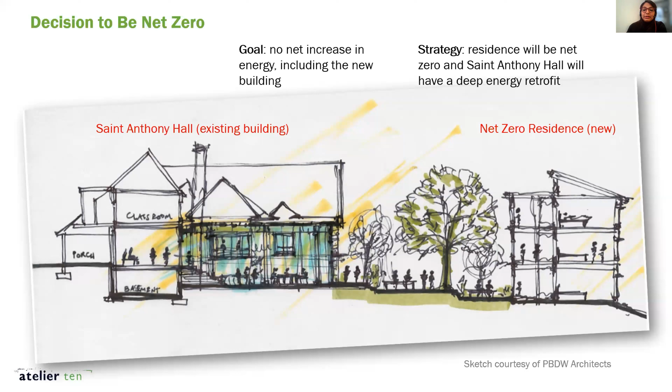When we set out to do our energy analysis, our discussions were mostly around what our goals and ambitions were, and how we were planning to achieve them. This project was meant for residents who are not necessarily from the state—they're coming from warm climates near the equator, so they really weren't used to these cold conditions. Thermal comfort was a priority.

We wanted to make sure our success was measured using data, energy simulation, and eventually measured data. We knew we wanted a net zero project, but not just for year one—we also wanted to account for a buffer, so that any variation in operation and climate would be accounted for in this analysis.

We had several opportunities, such as making sure the massing was set right from the beginning itself. We also had challenges because this is a net zero project—we had a limited roof area to begin with, which was one of the bigger challenges we knew we had to deal with.

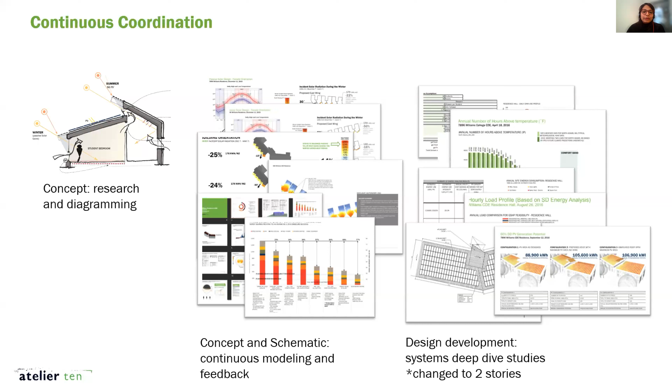Using our energy model as a reference, we were able to show how a certain decision would impact the overall goal for net zero energy. In terms of modeling tools and workflow, we used IES VE in the beginning—this was 2015, for early schematic design phase modeling, where we evaluated all of the passive strategies using the IES software.

And then as we transitioned and as we firmed up the design, we moved on to eQuest so that we could model the waterside systems a little bit more closely. Again, this was to make sure that we are overcoming certain limitations in the modeling tools back in the day.

For PV generation potential studies, we used Rhino and Grasshopper so that we could account for shading and overshadowing, and so that we could also account for the trees and the neighboring context more accurately.

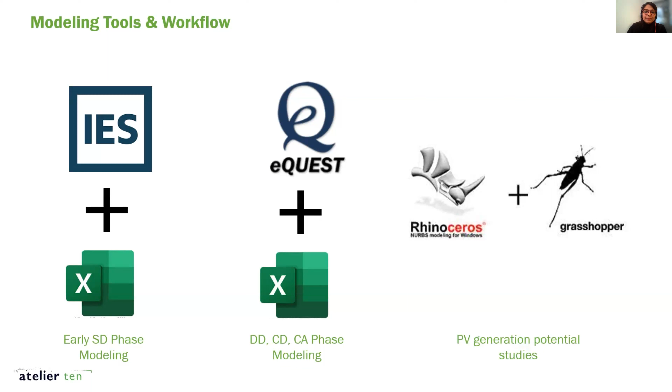Overall, we first started with developing an energy budget with the available roof area and calculated the PV generation potential as a starting point. We compared this with the energy use profile of a baseline, ASHRAE baseline energy model. The black line shows the baseline consumption data, and the shaded green portion shows the on-site generation potential from the available roof area.

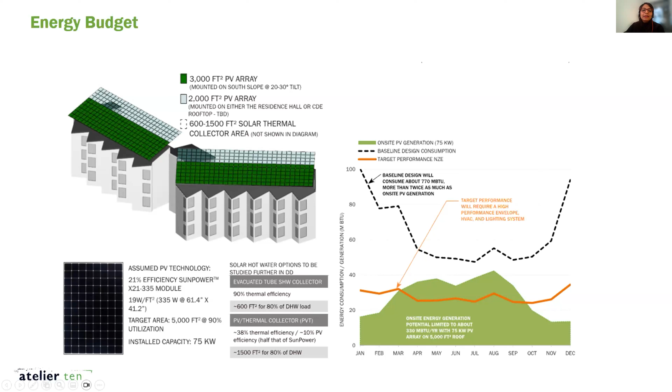And we very quickly knew that we had to look at several energy efficiency measures in order to make sure that we can hit our net zero energy goal.

We started with a passive-first approach, and we performed an envelope sensitivity study where we tested several R values for the windows, walls, and roof in order to come up with an optimized performance for the envelope. We looked at how much of an impact that makes to the annual HVAC savings, so that we are not over-insulating, but making sure we are hitting that sweet spot beyond which the envelope does not make a difference.

Along with that, we continuously coordinated with the architects to review their architectural details to make sure that there are no thermal bridges, and if there are, we provided recommendations on how to avoid or tackle these thermal bridges or minimize the thermal breaks in the design.

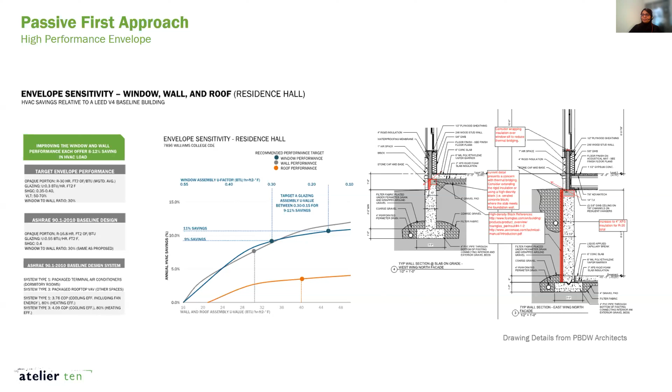Next up, we also looked at how we can limit summertime cooling. With this climate, we knew it was to our advantage, and the temperatures were not significantly high, but even so, we thought we should look at the peak design day condition to evaluate how we can minimize summertime cooling by deploying natural ventilation and operable windows and looking at external shading.

In addition to that, we also looked at how we can further reduce the discomfort hours by implementing supplemental ventilation cooling strategies in the project.

Overall, we did see a significant reduction in the discomfort hours as indicated by the graphs on the right. And all of these passive strategies helped us make sure that our electricity consumption from mechanical cooling in dorm rooms was minimal.

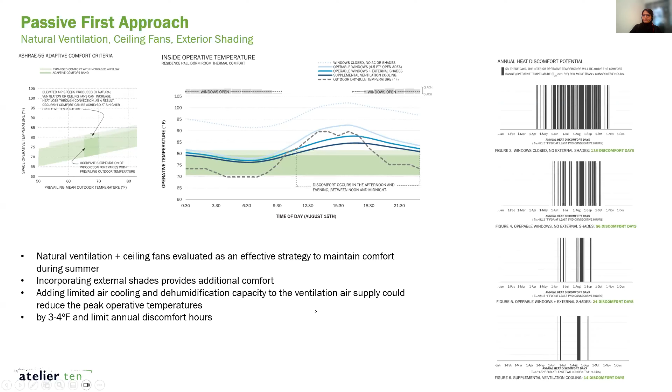Along with those passive strategies, we then looked at several other energy efficiency measures to evaluate a pathway to achieve the net zero energy goal that we established.

So here you're looking at the bar graphs where the base design had steam because this project had steam. But when we're looking at an ASHRAE-compliant baseline, the energy consumption was significantly higher, as discussed earlier,

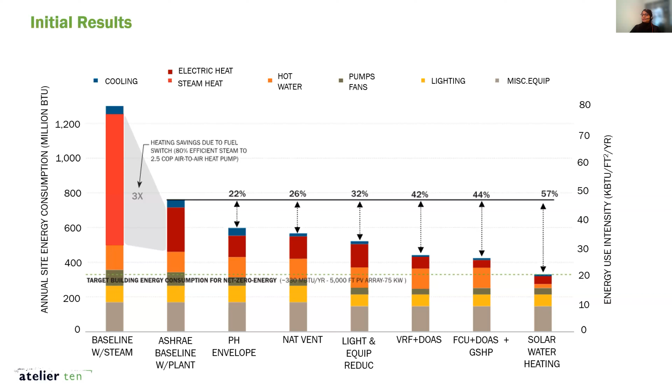compared to what the roof can generate. As we implemented energy efficiency measures such as passive house envelope, natural ventilation, reductions in lighting and equipment, and looking at more efficient all-electric systems, we were able to gradually reduce the overall energy consumption. The solar water heating system is another measure that helped reduce the domestic hot water requirement, or the energy consumption by the domestic hot water, in this project.

Another thing we looked at was the first cost for several variations of all the energy efficiency measures we evaluated, because space was a constraint and we also wanted to make sure that we are not exceeding the PV requirement for this project.

We were looking at the implications of an increase in first cost and compared that to an increase in first cost for PV. So for some scenarios, we found that often the lower first cost solution resulted in an increase in the first cost of additional PV required for the project.

While in some cases, such as these HVAC alternatives, we found lower first cost solutions which are energy efficient and do not result in an increase in PV requirement. This helped the design team take decisions around first cost, while making sure we are not compromising the net zero energy goal.

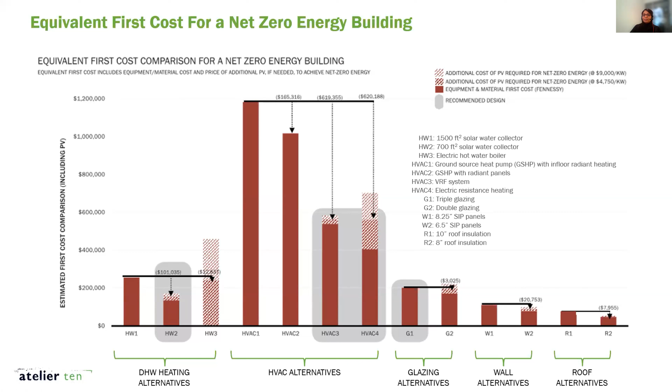For the PV generation potential, as I mentioned, we used Grasshopper and Rhino to evaluate the context implications on the renewable electricity generation potential. We found that when you add these trees, you reduce the overall generation potential by around 7%, which is significant for a net zero project.

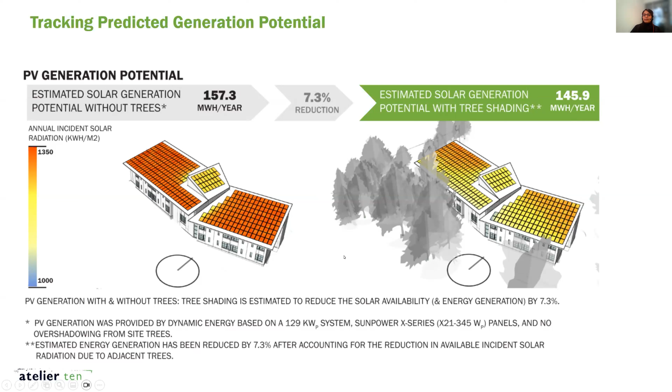So making sure that we are understanding what our energy budget is again is very critical when it comes to PV generation potential.

One other thing we looked at was the year-on-year degradation of the PV panels. We knew it didn't have to be net zero just in year one, but wanted to make sure it's net zero for all future years. So we accounted for a buffer in the energy production capacity, comparing the percentage of degradation per year while deciding what products to use for the project.

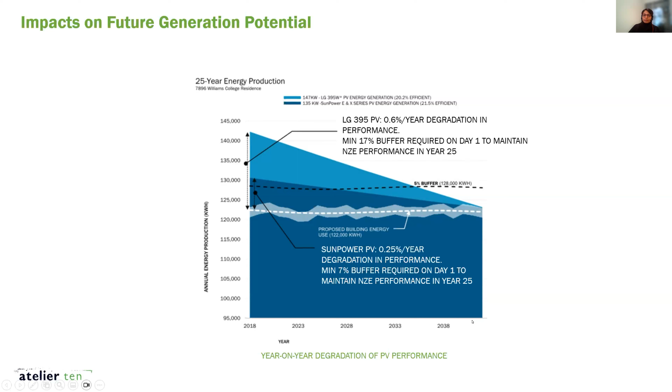Because this is a net zero project, we were constantly tracking assumptions. Operational schedules were reviewed several times during the energy modeling process, which plays a big role since this is a dorm building, and there are times of the year when students aren't in the facility. We wanted to account for that, but the decision kept changing, so we had to make sure we had buffer for students to be in the dorm during summer months as well.

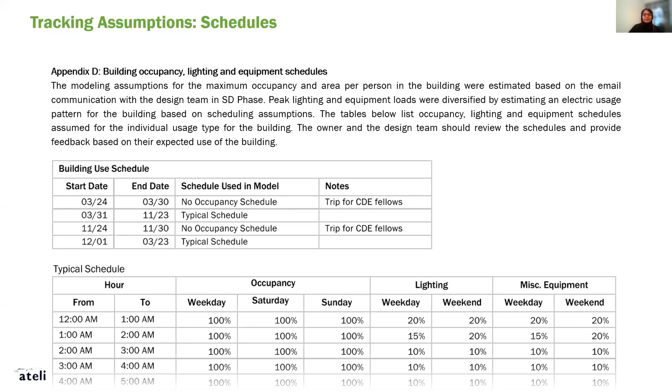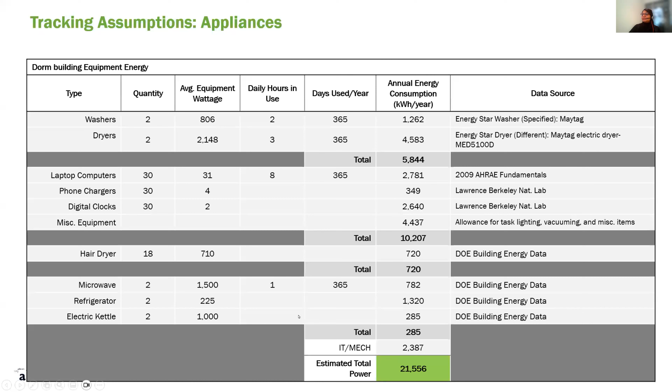The other big item was tracking the assumptions for the appliances. We had a laundry list of all the appliances that would go into this facility based on the occupancy we knew about, and this was verified and reviewed by the university. Even when looking at submittals, we kept an eye out for any large pieces of electricity hog equipment, so we weren't missing our target.

The other big piece was domestic hot water demand. Understanding the shower duration and sink usage was very critical when identifying the overall daily total of hot water gallons used in this project, so we could come up with an estimate for the hot water consumption and energy use.

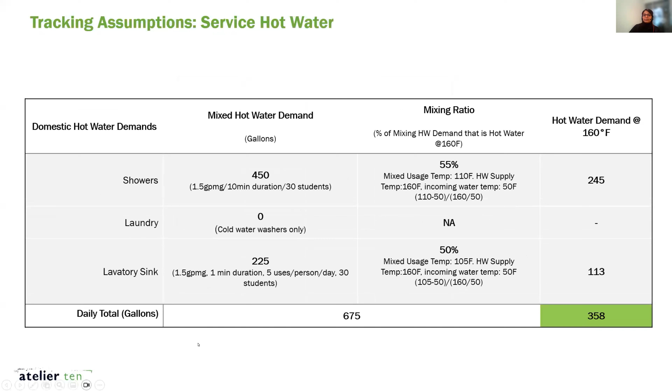Overall, at 100% CD phase, we landed on a design that was truly high performance, with a modest window-to-wall ratio of 22%, R40 walls, R60 roof, making sure our air leakage rate did not exceed 0.6 ACH at 50 Pascal, following passive house requirements. We also made sure blower door testing was included in the commissioning requirements, which did come up lower than 0.6 ACH when we evaluated it.

The mechanical system for this project included geothermal well fields and ground source heat pumps, and the air side included dedicated outdoor air units with 4-pipe valence units for supplemental heating and cooling. For domestic hot water, we tried hard to incorporate heat pump systems for heating, but with size constraints and the fact that we weren't able to put in a centralized system, we switched to an electric hot water point-of-use system. A 129 kilowatt PV array was finally put in to achieve the net zero goal.

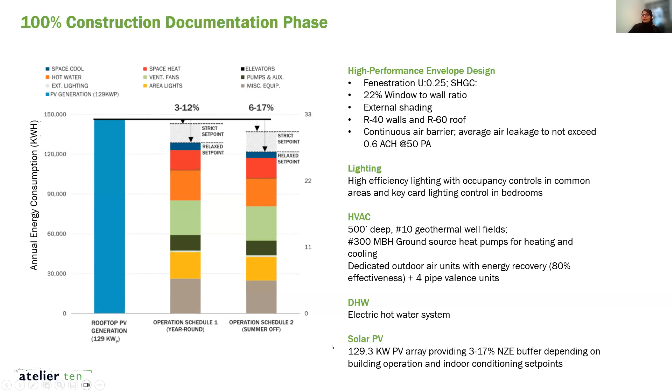We came up with several recommended operational practices for the facilities as well as the students, so the project continues to stay net zero, because mindful usage is very critical in making sure the project keeps hitting these goals year on year.

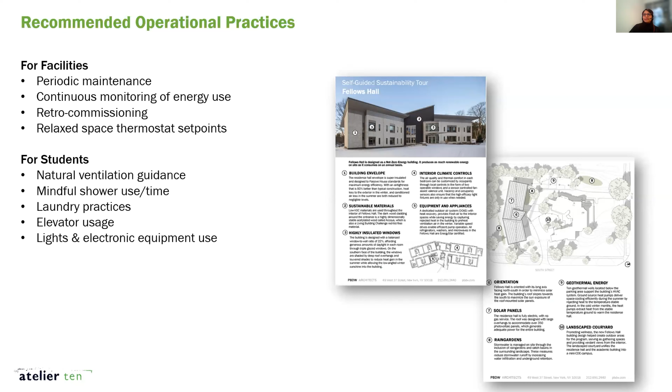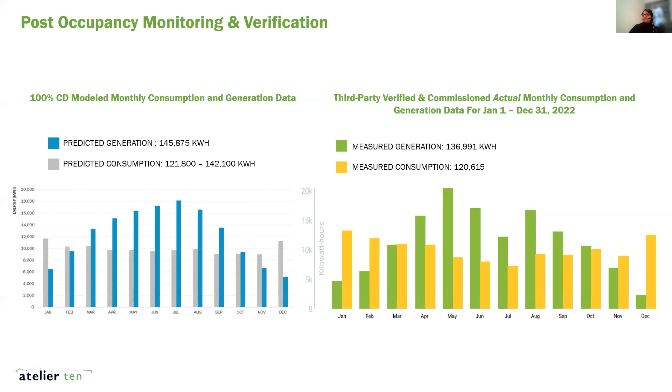Lastly, I wanted to share the post-occupancy monitoring and verification. This was completed by another organization hired by the university. On the left you see the modeled predicted generation and consumption data, and on the right the third-party verified commissioned actual consumption data on a monthly basis for the last year, which, although there's a difference between what was predicted and modeled, is fairly close to the analysis we did.

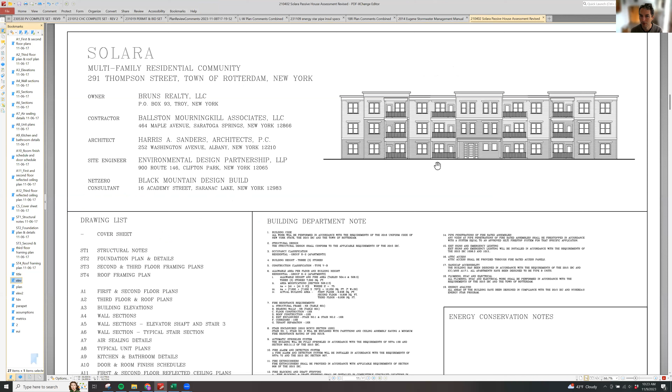Basically, it's a 3-story double-loaded corridor walk-up apartments. There's 24 units per building, mostly 2- and 1-bedroom units. And of course the leaf blower comes now, so I apologize if there's background noise.

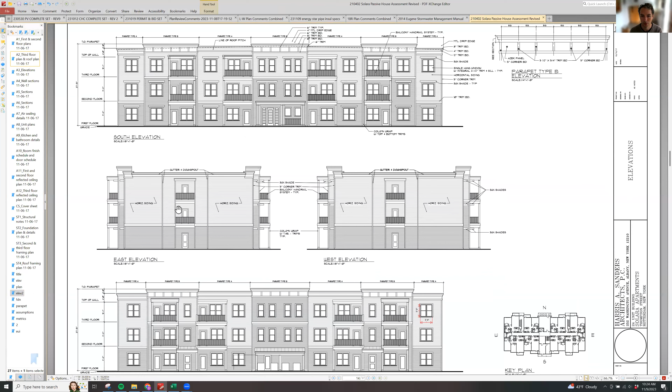The elevations has the south - the kind of long axis of the building is more or less oriented to the south within 15 degrees, and there's equal window to wall ratio on the south and north facades, but no fenestration on the east or west.

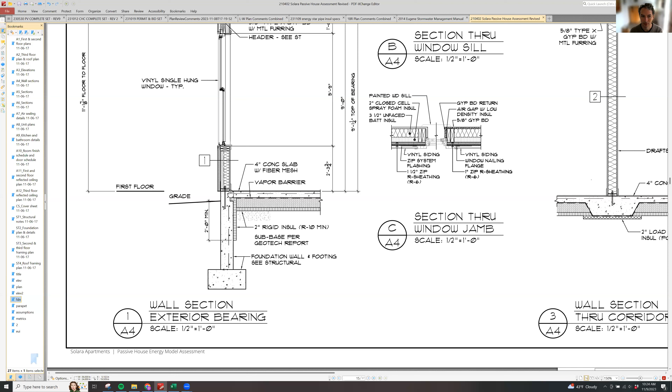It's a 2x6 construction with a mix of closed cell foam and batt insulation in the cavity, along with zip sheathing, so a 1-inch of polyiso on the exterior continuous. We achieved a thermal break at the slab with the inset kind of sliver of foam you can see here, and I'll zoom in on that just a little bit.

And then continuous foam underneath the entire slab as well. Up at the parapet, we have 7 inches of foam over the deck at minimum, and then some spray foam to kind of span the gap along the rim of those flat roof trusses.

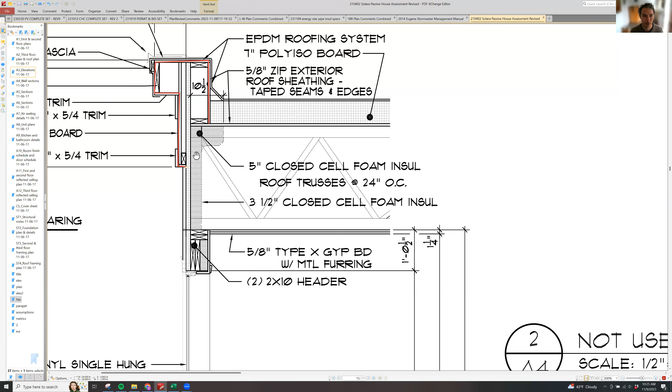To quickly walk through the design of the project, again, this is Albany area, so climate zone 5. In both models, we're following the standard assumptions of the modeling protocol. So with the PHPP, we're following a PHI protocol. With WUFI, we're following PHIUS protocol. So we're using the heat...

Those have the same heating and cooling set points, and very similar occupancy, a difference between 57 and 62 occupants.

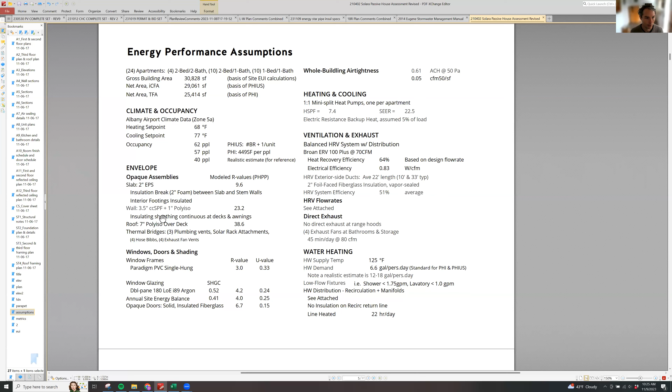I mentioned the envelope. The windows are very affordable, double pane PVC single hung windows. I've been impressed - this particular window has been able to achieve air tightness below 1 ACH50. I believe some of the buildings even hit 0.6. Even with these single hung type windows, I would never recommend this. I think this is an unusually high quality unit.

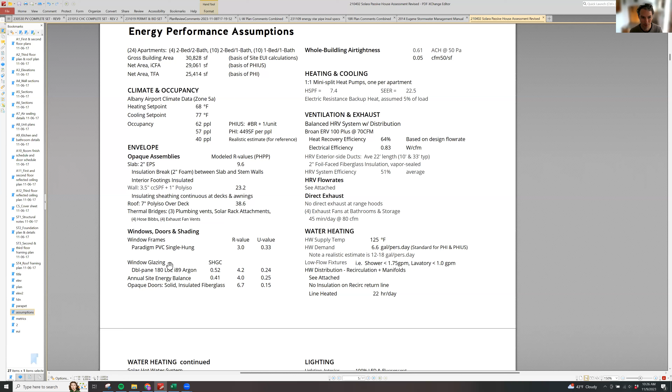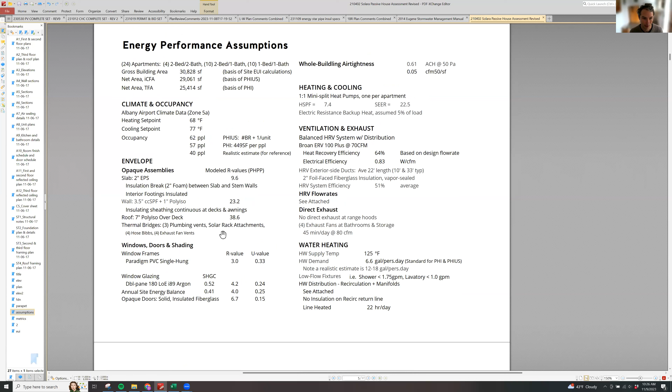Typically we want to recommend casement type or some kind of a positive compression seal at windows when we're trying to get to those levels of air tightness. It does have the low-E i89 coating, so it performs as equivalent to a poorly performing triple pane window, if you will.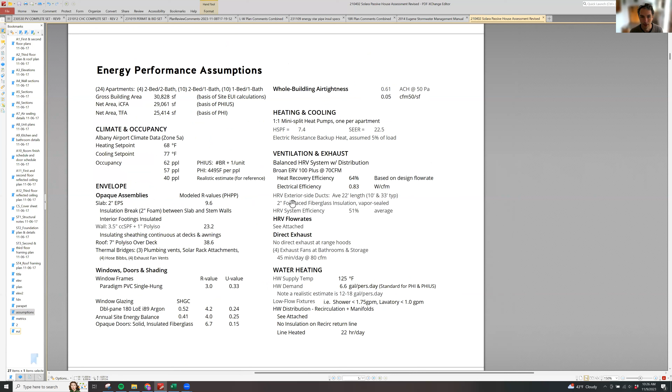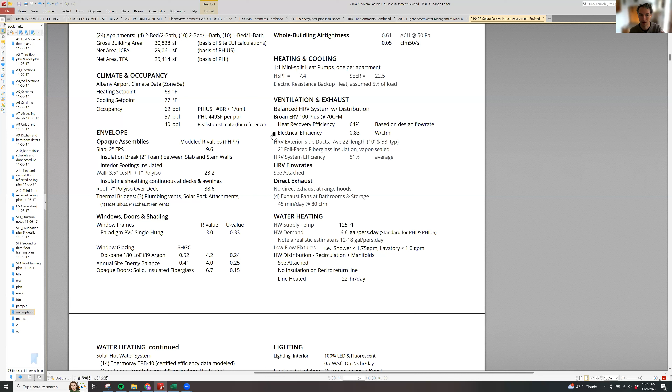For heating and cooling systems, we have 1-to-1 mini split heat pumps in each apartment. And then also an ERV system that's semi-centralized within the core of each stairwell that services a number of units.

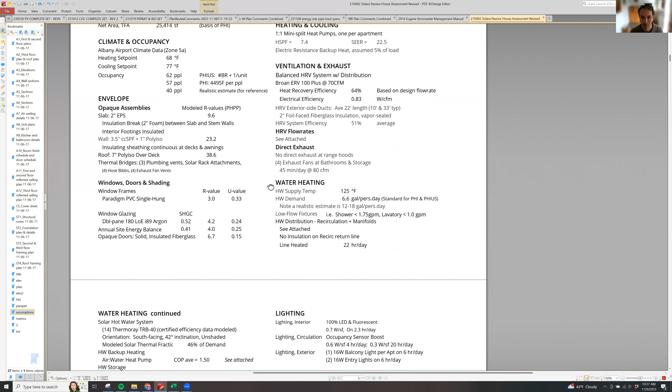There's some direct exhaust at just a couple of bath fans in the project that weren't able to be connected to the ERV. For the water heating, we have a pretty elaborate solar water heating system on the roof and a very large tank - I want to say a 1,200 gallon tank. And then backup heating is an air-to-water heat pump, a unitary type.

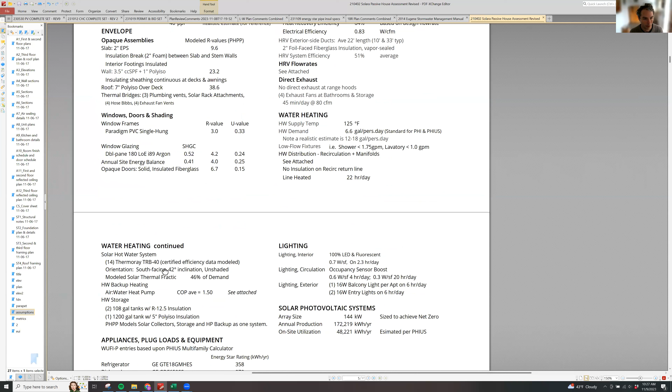Appliances are all Energy Star. One thing I will note for plug loads: PHIUS has pretty clearly specified protocol for plug load assumptions. With the PHPP, there's not a standardized assumption - they basically trust the energy modeler to use data that's appropriate for that locale and that building usage. So I made my estimate based on my experience, but that's a pretty wide variable that, depending on what you assume there, can really dramatically change the results. So I'll make that caveat.

Lighting is a pretty standard efficiency, high efficiency lighting system, and then there is quite a bit of PV on the roof.

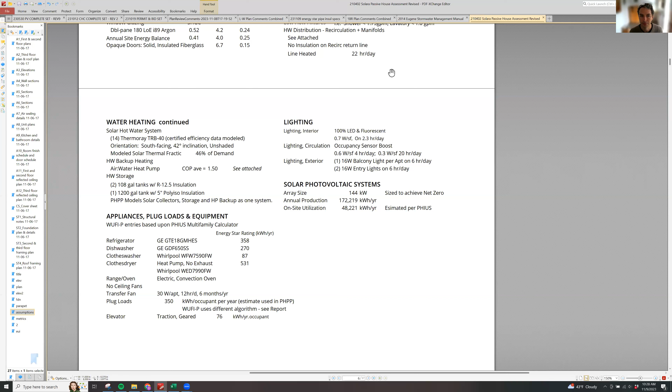So the side-by-side comparison into the two models, these are the primary passive house metrics here. In blue, we can see the PHPP model, and in green, the WUFI-P model.

Overall, the heating loads, heating demand and heating load were within a 14-15% discrepancy of one another, so that's pretty good. The cooling side was a little less so, between 26 to 30% discrepancy between the two models. I think a big part of that probably has to do with the plug load assumption, and that variability leaves a wide margin for potential differences in how the two will come out.

Overall, though, the site EUI matches pretty well between the two projects. We came in within 1% of one another.

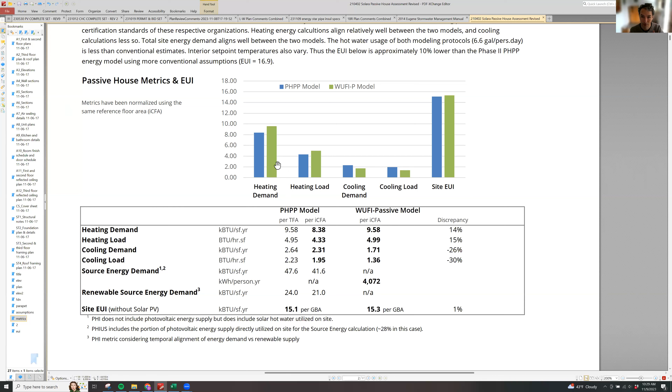So when we zoom in at the specifics of meeting the passive house standard—not that that was a project goal here, but if it were, it does make a difference which standard you follow. Just an asterisk here: these metrics have been normalized for the same reference floor area. PHPP and WUFI use different reference floor areas, but for this analysis we're using the same floor area, so it's an apples to apples comparison.

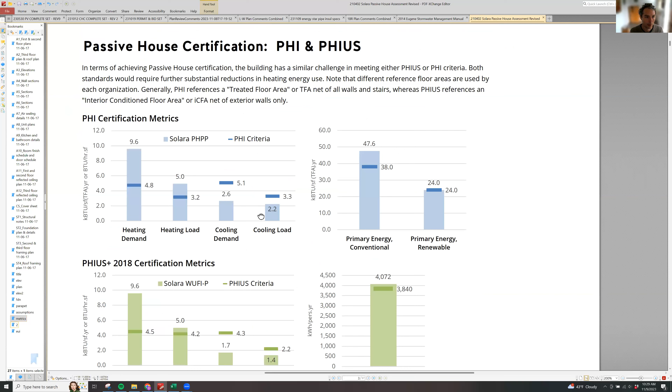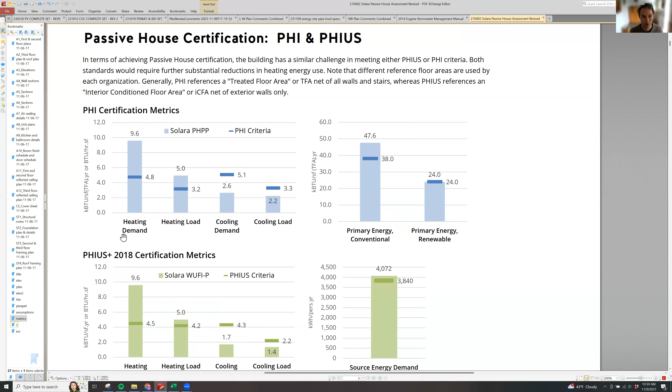Looking more specifically at the passive house metrics in terms of which standard is more difficult to achieve—this is a question I often get from clients—it's really pretty close. When we model based on the standards of the certification protocols with the two different tools, you can see the heating demand load, cooling demand load, and the primary and source energy metrics really align pretty well.

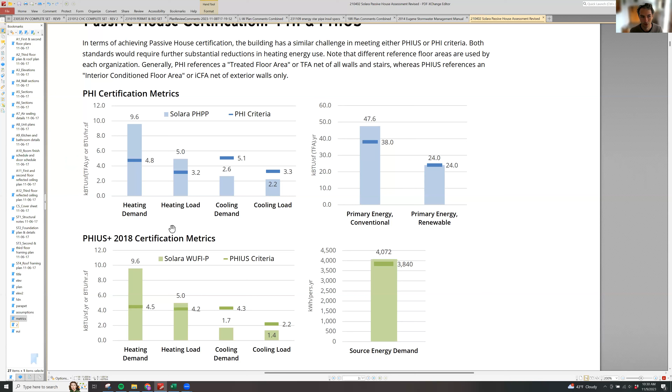The bar here shows the metric that's required, and the larger bar shows the consumption of this particular building. So if we were to try to achieve passive house with this building, we'd have a hard time doing it under either protocol.

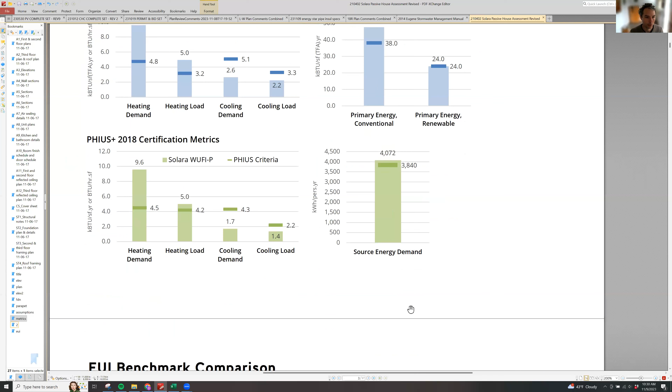And then finally, backing out and looking at the overall EUI, this is demand on the bottom and supply on the top. A typical existing building is going to have a pretty outlandish EUI in this climate zone. Code minimum would be around 29. Architecture 2030, at the time this was done in 2021, would have us meet around 20, and we're coming in right around 15 with both models.

And then positive to the 19 on the production side. So big picture, whether you're going with PHPP or WUFI, whether it's PHI or PHIUS protocols you're following, you're going to be meeting an overall pretty similar level of stringent energy efficiency.

I'll just leave it at that and leave some time for questions at the end.

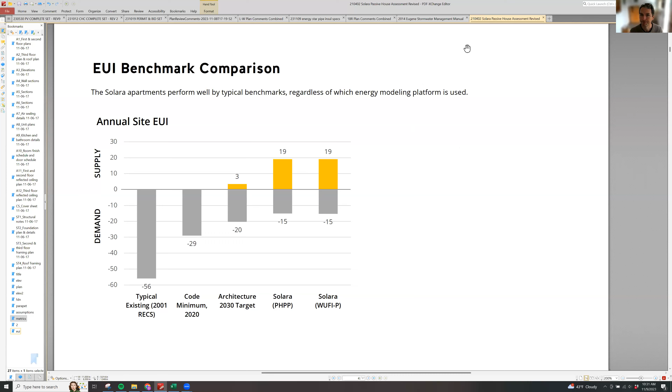So our third speaker is Zhongdi Chen. He is a building performance engineer with White and Company, and he performs energy modeling for net zero energy designs, energy code compliance, and third-party certifications. He also conducts related research in daylight modeling, and he's helped design 5 net zero energy projects and has played an integral role in leading Illinois' first and third net zero energy projects through the verification process.

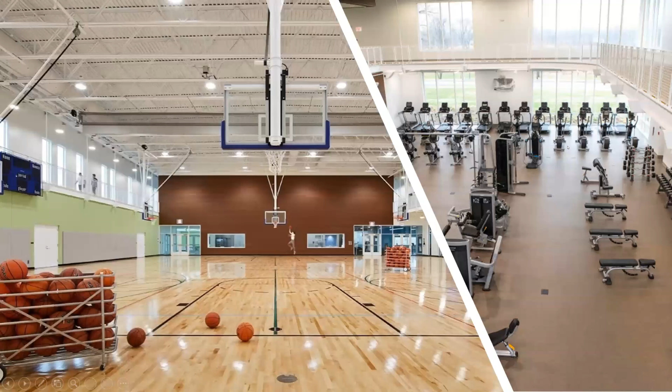The building is 44,000 square feet with a 20% window ratio, and most of the windows are actually curtain wall on the southeast corner and northeast corner. So we're looking north now—this is the southeast corner. Because this is a commercial gym, it operates 16 hours a day, which is a huge disadvantage for net zero projects. This is the basketball court, and this is the gym looking north, with a big curtain wall.

So this building emphasized energy efficiency from a very early stage because we had the idea of pursuing a net zero foundation grant, called the Illinois Clean Energy Community Foundation. In order to receive the grant, we must be net zero. We received $1.8 million in total, which funded the premium cost of materials, design, and PV arrays to make it net zero.

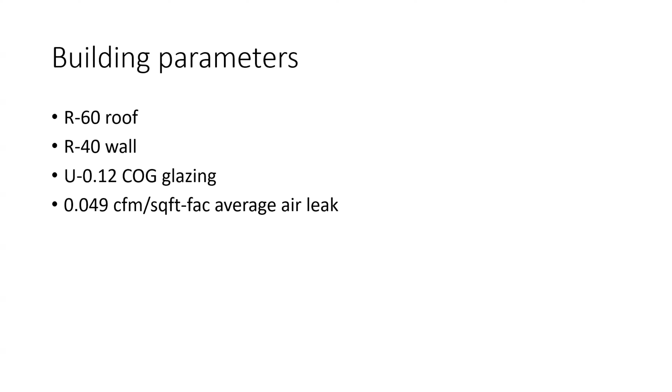In order to apply for this grant, this building must be passive house certified. So we have R60 roof, R40 walls, and 0.12 COG glazing. It is not triple glazed, but it's almost semi-triple glazed — only the center panel is not glass, it's plastic. The tested average building air leak is 0.049 CFM per square foot at 50 Pascal, which is right below the passive house threshold.

As for building systems, we have air-to-air heat pump for the majority of the building, for all the tall volume spaces, and VRF-DOAS combination for the admin space. We also have some unit heaters scattered around in stairs, vestibules, etc.

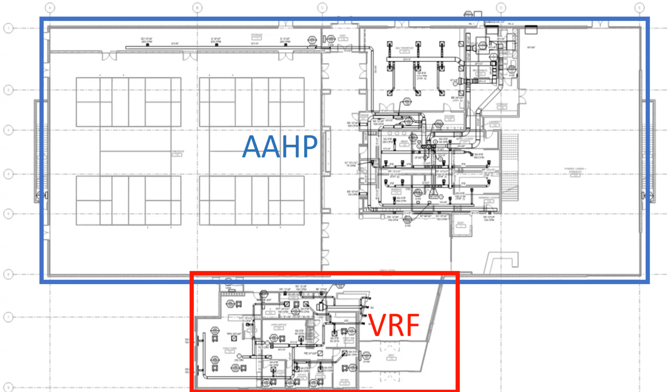The model result is we are looking at 27 EUI without PV and negative 0.4 with PV. The actual EUI we measured was 29 EUI without PV and negative 0.24 with PV. This building managed to certify as net zero in the first 12 months of operation, which means this data includes some bad data from the first couple of months.

After the building is operated, there are problems. We find the problem, we fix them, but inevitably they put a dent into the performance. So we did a lot of tweaks and adjustments to improve its performance — the actual EUI for the building today should be even better than this number. This is just when the building was certified and when we walked away from the project. So that's all for the building overview.

Now I have some energy model highlights and lessons learned during the design and post-occupancy period. Because we wanted to pursue net zero from day one, the energy model has been a very important piece from the early stage. And this is Chicago.